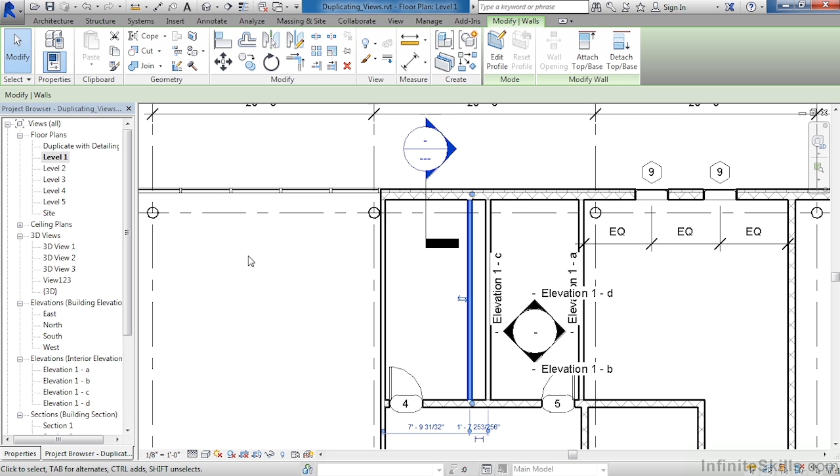If we zoom out by spinning the wheel on the mouse, then zoom in on this wall between the two bathrooms, we can then select on this wall, then click this arrow right here, and those double arrows have now moved that bathroom wall over to the other side. It's flipped the bathroom wall's face from being on the right-hand side to the left-hand side of the wall. If we look at the Duplicate with Detailing view, we can see that that change has also occurred with this wall inside of this view because a wall is a three-dimensional object.

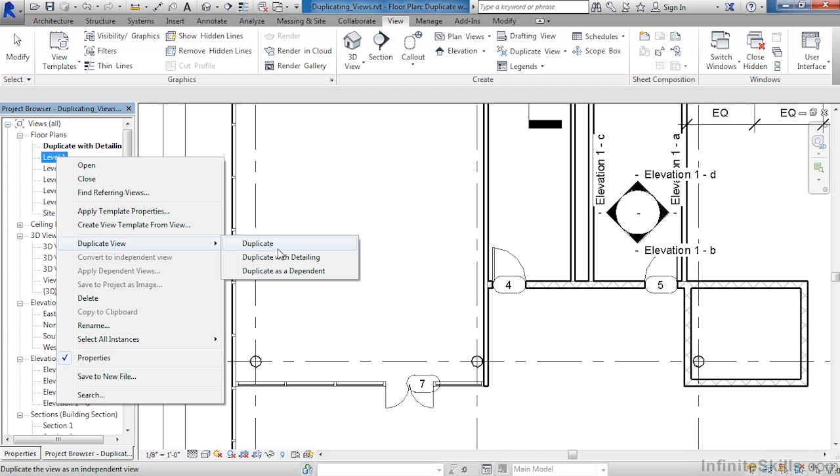There are two other kinds of duplicating that we can do. Move your cursor over and once again select on Level 1, right-click, and this time move your cursor down, highlight over Duplicate View, but now select on Duplicate. You will notice that all the annotation is now gone. There are certain things such as these elevation tags, as well as the column grids, which stay around. All the dimensions, any pieces of text, all of the tags for the doors and windows have now gone away

because when you just duplicate a view, it makes a duplicate of all the three-dimensional information. If we change any of the three-dimensional information, it will update in all the views. But by doing a duplicate, it gets rid of the text, dimensions, those sorts of things, so that we can now create such things as furniture plans or interior finish plans.

The third kind of duplicating that we can do is if we once again move our cursor up to Level 1, right-click on Level 1, move down to Duplicate View, then Duplicate as a Dependent. We can see that it has now created a new view directly underneath Level 1. Let's do this one more time. So once again, right-click on Level 1, Duplicate View, and Duplicate as a Dependent.

What dependent views allow you to do is make a change inside of the main view, and then that change will show up in both of the views that have been duplicated. Or vice versa is true. If you make a change in one of the dependent views, then that change will show up inside of the other view. This is sometimes needed if you have a view that's too long for a sheet and you need to make that view shorter so that that view can then show on one sheet and then another view can show on another sheet.

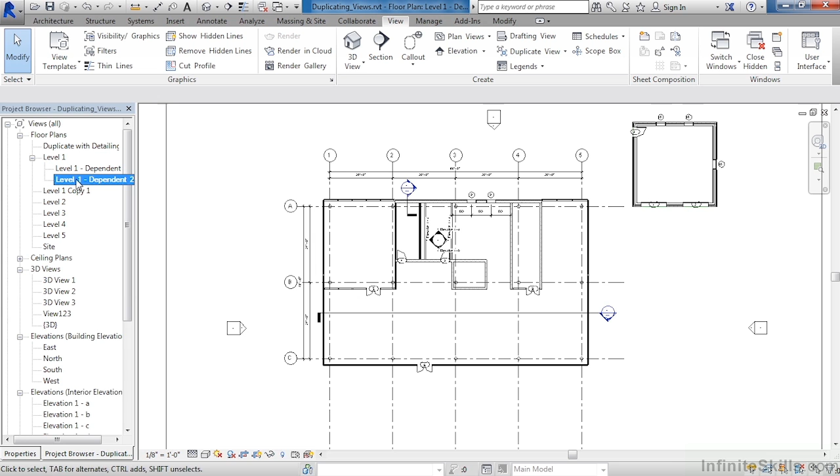An example of this would be if we right-click on either one of these dependent views, go down to Rename, then call this Left, click on OK, rename the other one by right-clicking on its title, going to Rename, typing in Right, we now have a left-hand view and a right-hand view.

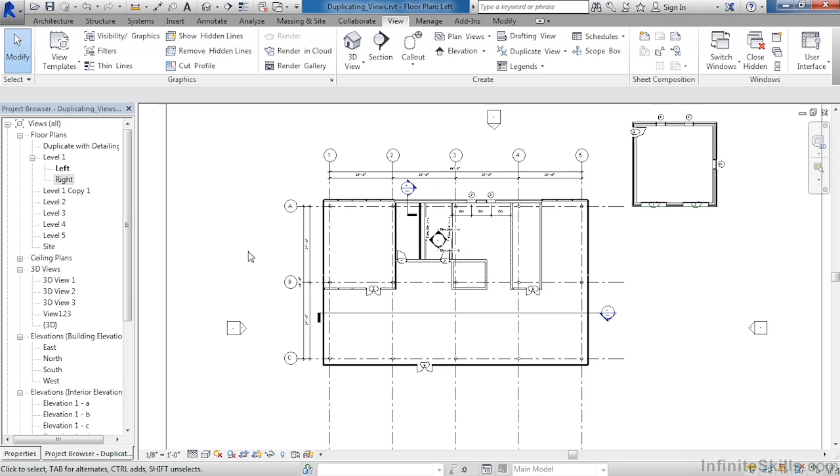If we zoom out with this view, making sure that Left is currently selected, we can now select on this box that goes around the view. This is called the crop region. Then click on this dot and pull it in. Now we just have the building on the left-hand side. If we click on this dot here, we can further crop it in.

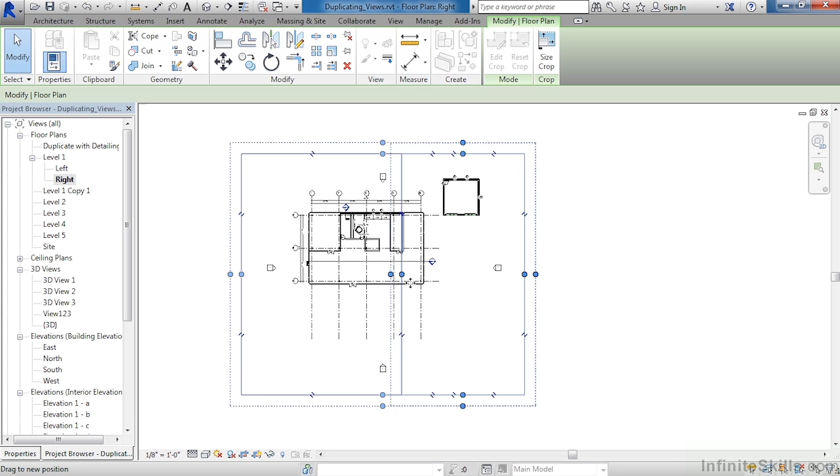If we double click on Right, we can see that we have the view that has all the information in it. Once again, select on that box, grab onto that dot, pull it over. You can pull it over again. Now we have the other building over on the right-hand side, and that could be on the right-hand sheet.

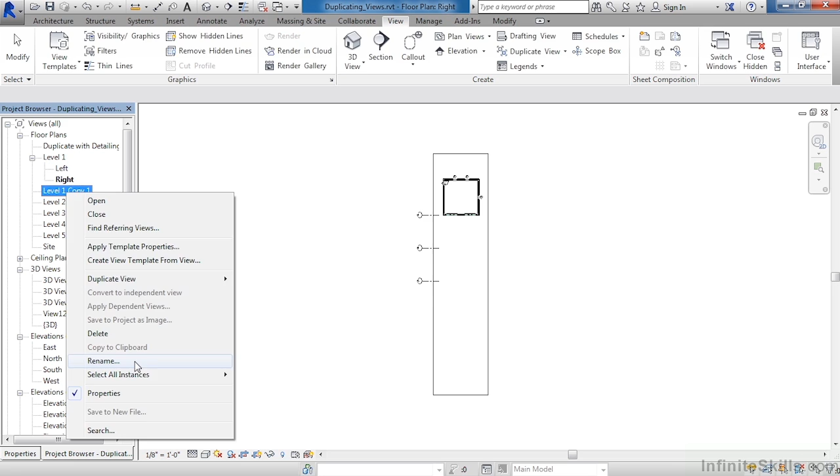And finally, while we're here, go to the Level 1 Copy 1, select on that. This is the view that we actually just made a duplicate of. We want to call it Duplicate. So let's right-click on that view name, move down to Rename, and now name this view Duplicate, and select on OK.